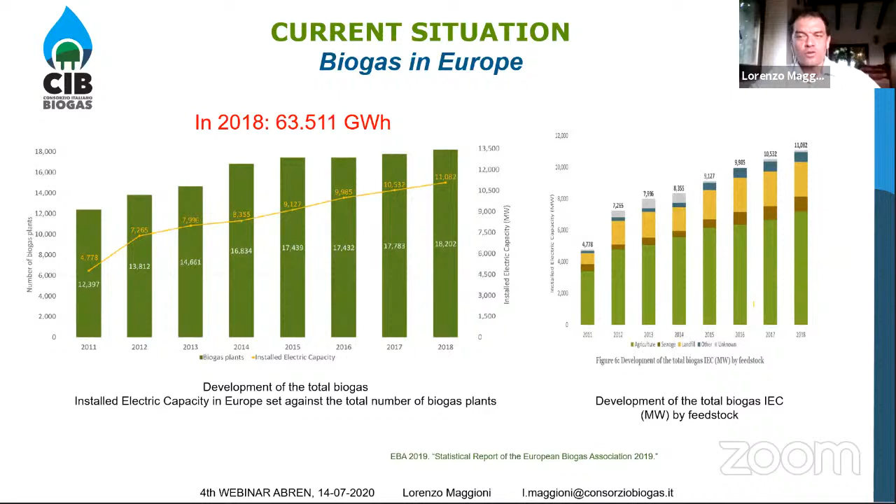For biomethane production, exactly as is happening for electric energy production, we are using mostly agricultural residues. It is forbidden to use energy crops. In order to produce biomethane in Europe, you need to use only agricultural residues and agricultural byproducts. It is also possible to use the organic fraction of municipal solid waste.

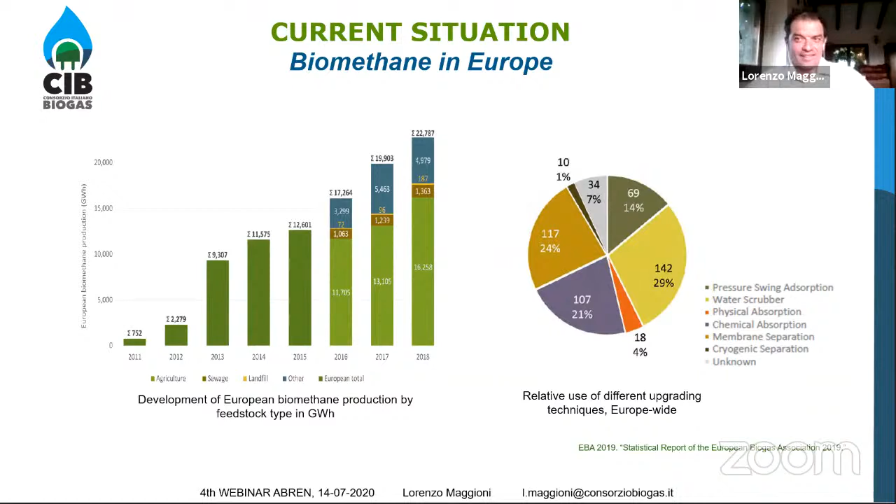Now I want to start to talk about biogas and biomethane in Italy. Italy is the second market after Germany. We invested more than 4 billion euro in the last 6 years. We have more than 1,800 biogas plants with a total installed electric power of more than 1,300 megawatts, equivalent to 3 billion cubic meters of biomethane per year.

Thanks to the biogas sector, it's important to stress that we also created a lot of green jobs. We estimate around 12,000 green jobs.

Talking about biomethane, I want to explain what is happening in our country. For the moment in Italy we have no more subsidies for the production of electricity. In September, only for a few months, we will have the opportunity to submit new projects, around 100 of them. We are waiting for a new decree that will allow us to start again with renewable electricity production thanks to biogas.

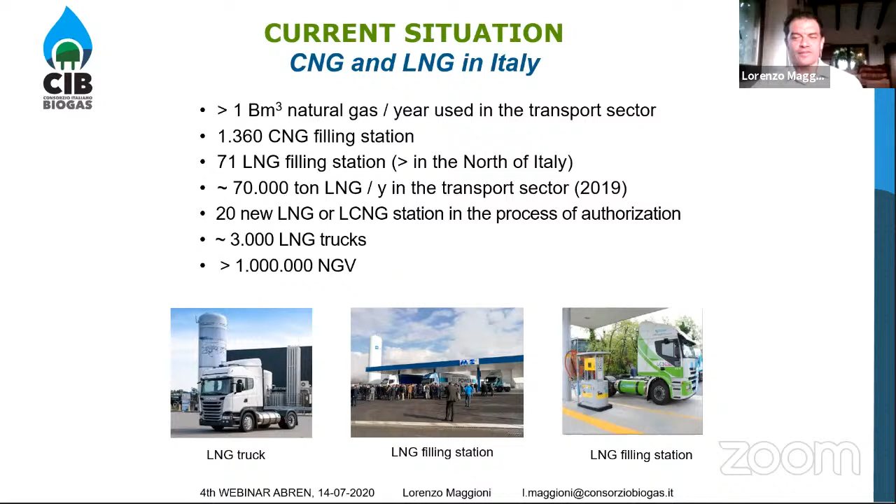So what about biomethane? In March 2018, our Italian government published a really interesting law that introduced subsidies for the production of biomethane. The maximum biomethane production with subsidies will be 1.1 billion cubic meters per year. It's important to stress that to achieve these subsidies, you have to demonstrate that the total amount of biomethane you produce is used in the transport sector.

How is this possible? You can show it by injecting biomethane into the natural gas grid, and then, thanks to a mass balance process, it's possible to transport it virtually all over Italy and sell it in existing CNG filling stations. It's also possible to compress the biomethane and transport it by trucks to sell at filling stations, or to liquefy the biomethane and sell it at LNG filling stations.

The Italian government gives really interesting subsidies if you build a new filling station. You receive 0.6 million euro for each new filling station you build, and 1.2 million euro for each liquefaction unit you build.

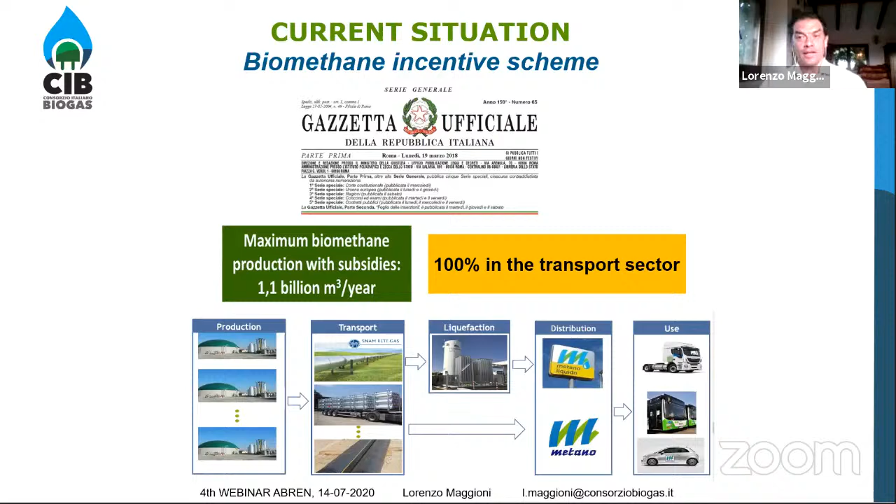It's possible to add these two subsidies together. So if you build a new filling station and a new liquefaction unit, you receive 1.8 million euro, and in addition you will also receive subsidies for the biomethane production.

In this slide you can see which kind of subsidies you receive. I don't want to explain how the system works now—last year when I was in Brasilia I explained it, and now I don't have enough time. Our Italian system is really a little complex. I just want to explain using numbers.

So I want to give you an example: a 1 megawatt equivalent electric biogas plant means 500 cubic meters of raw biogas and more or less 250 to 280 cubic meters per hour of biomethane. Your turnover will be around 1.3 to 1.4 million euros from subsidies alone. In addition to the subsidies, you also receive money from selling your biomethane or liquefied biomethane.

Let me give some examples. If the price of natural gas is 0.18 euro per cubic meter, you receive 400,000 euro per year more. If you sell your biomethane directly to the final customer through a filling station, with an average price of 0.55 euro per cubic meter, you receive 1.2 million euro per year.

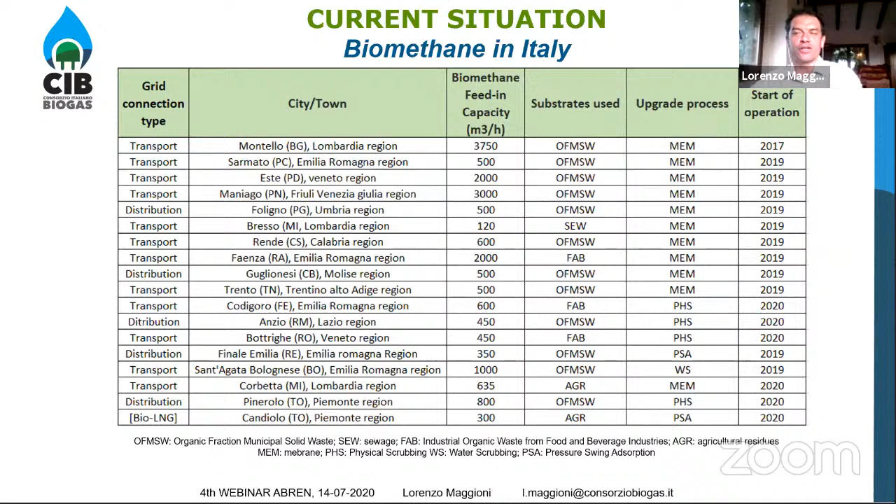It's really important to stress that in some of these plants, they are not only producing biomethane, but also producing carbon dioxide. In the largest plant, in Montello, they are producing a very huge amount of biomethane, but Mr. Moretti will explain better.

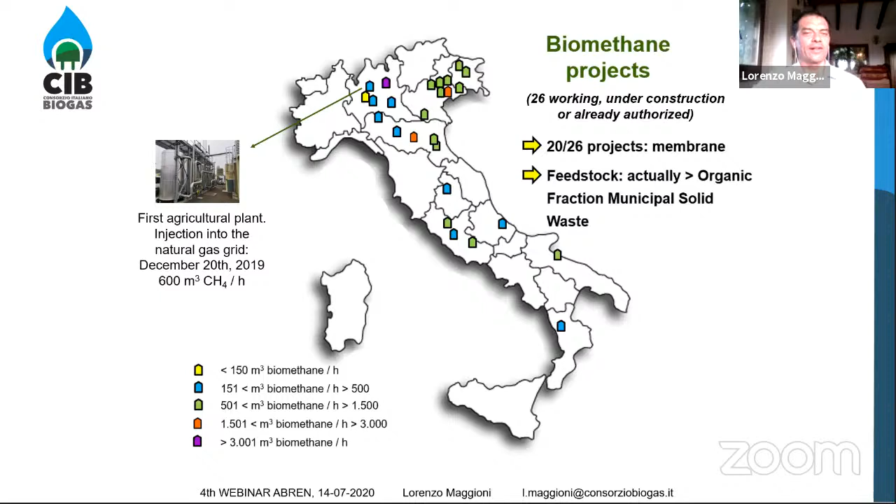Now I have the last 4 or 5 slides, one case study: Cooperativa Speranza, an agricultural cooperative of 5 farmers working together. They own 2 existing biogas plants, each with a size of 1 megawatt electric. They are starting to produce the first Italian kilogram of bio LNG, using 100% agricultural byproducts, and will produce 5.5 tons per day of bio LNG.

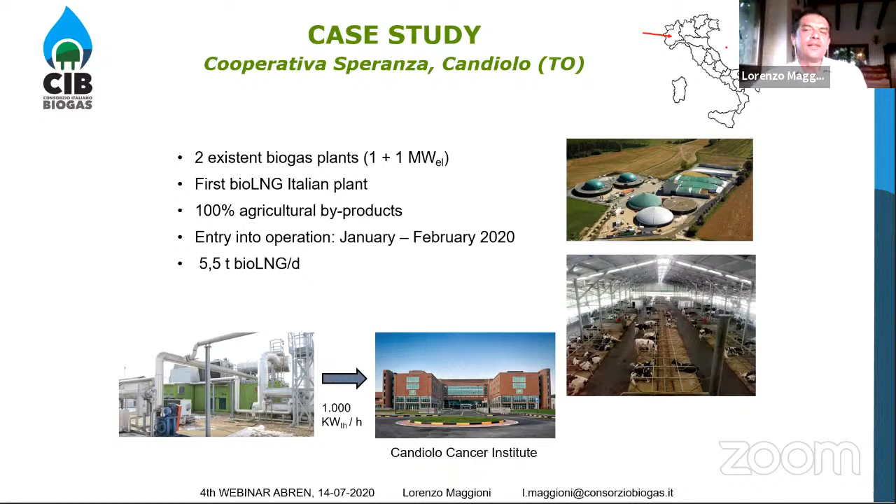It's interesting to show that they are also producing a lot of heat, which they sell to a cancer research institute. By using the heat coming from the biogas plant, the research institute spends less money and creates less air pollution.

How will they use the bioenergy? They signed an agreement with a company called Maganetti, which is the owner of a large fleet of trucks. They have already bought 42 LNG trucks, and Maganetti will start to use 100% bio LNG in their heavy truck fleet.

The Maganetti company owns one LNG filling station, but together with the Cooperativa Speranza, they are building a second one close to Milan, in the south of Milan.

In the next two slides, I will explain why they decided to use LNG and not more diesel.

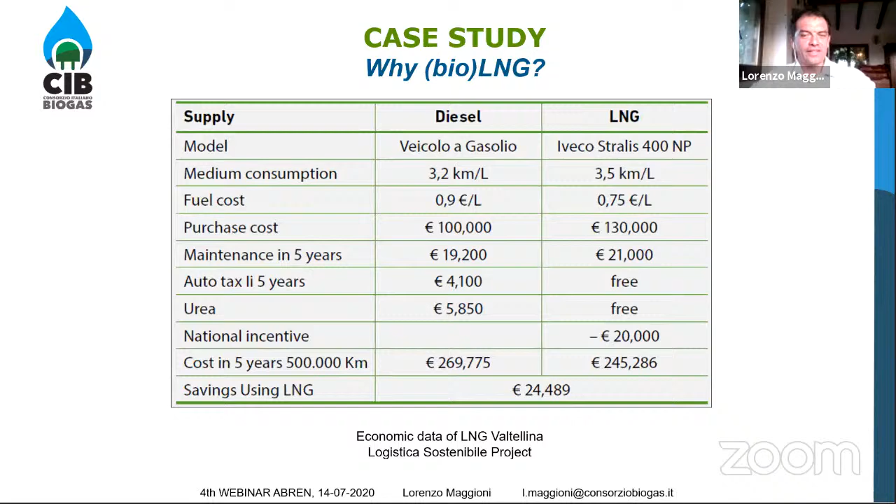Using LNG it's possible to save money, around 5,000 euros per truck every year, and it's possible to decrease pollution. In case you use fossil LNG, you decrease carbon dioxide emissions into the atmosphere by 15%. When they start to use bio-LNG, the percentage will increase a lot, it will be possible to demonstrate a decrease of more than 90%.

Using LNG or bio-LNG it's also possible to decrease a lot the quantity of NOx in the atmosphere, by less than 70%, and particulate matter by less than 99%. Also, the noise of the truck decreases a lot, less 6 decibels for each vehicle.

This is the alarm that is saying that I have to stop my presentation. Sorry, but I have the last slide.

This is the perspective in Italy. We are sure that in the next 2-3 years we will reach the goal of 1.1 billion cubic meters of biomethane, and half of the total amount of biomethane we will produce will be advanced biomethane. Advanced means we will use only agricultural byproducts, only organic fraction of municipal solid waste, and we will not use energy crops to produce this huge amount of biomethane.

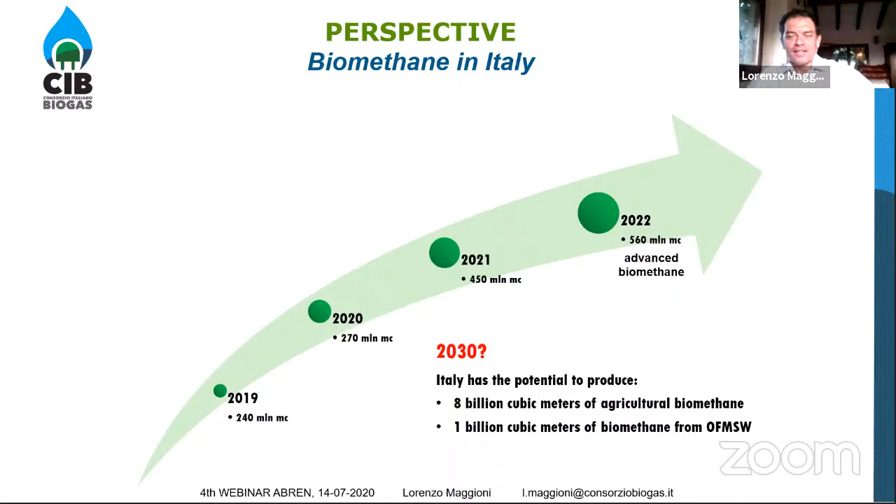So we will be able to produce at least 560 million per year of advanced biomethane and the same quantity of biomethane. So this was my last slide.

Thank you for your attention, and obviously at the end of the presentation I will answer your questions.

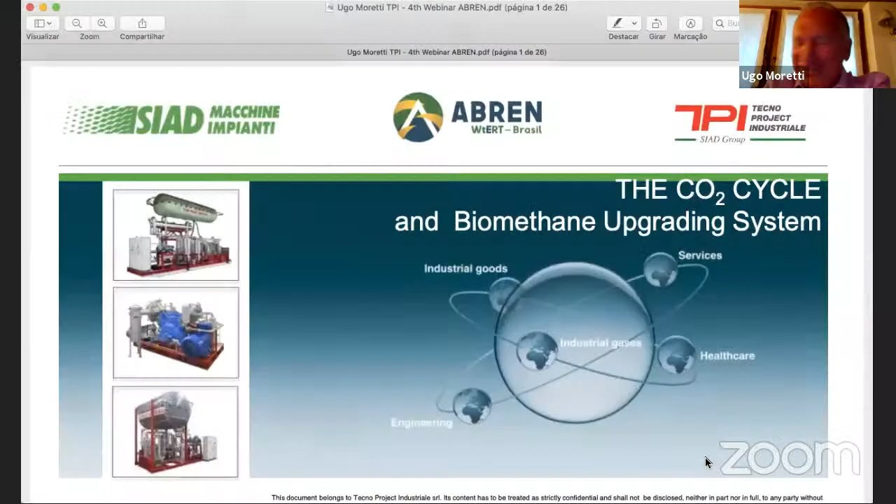Our company is not coming from the biogas field, but is a gas company specialized for 40 years in purification and production of CO2 and the separation of CO2 from any kind of mixture, including, of course, biogas in recent years.

Therefore, we don't start from the technology of biogas like other colleagues, but from technology of gas treatment. We also belong to a company which is a major producer of gas in Italy. Therefore, we profit by using this company for testing our technology on CO2 and application of CO2.

Even though our experience in CO2 extraction is mostly based on traditional solvents such as amine or hot potassium carbonate, we decided to move mainly to membrane technology, and of course still amine, after having selected among all the technologies for gas separation and purification. We know PSA for our hydrogen plant, oxygen plant, nitrogen plant, as well as membrane which we have used since ever for nitrogen production.

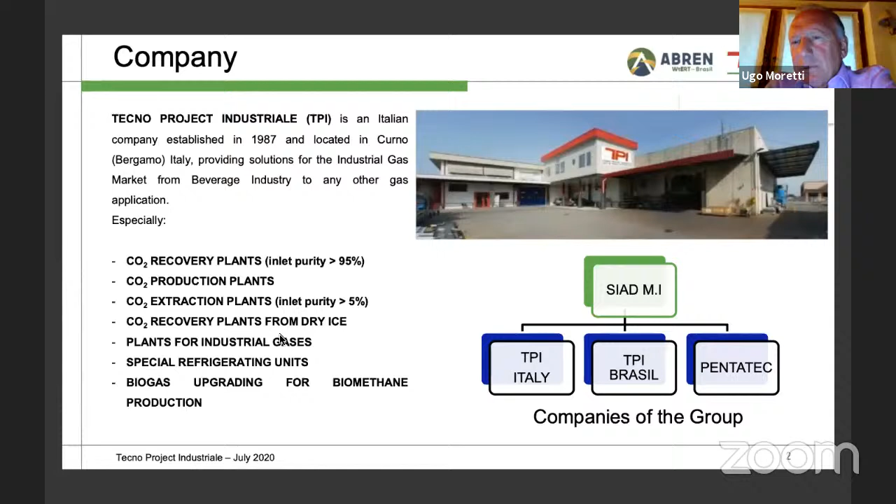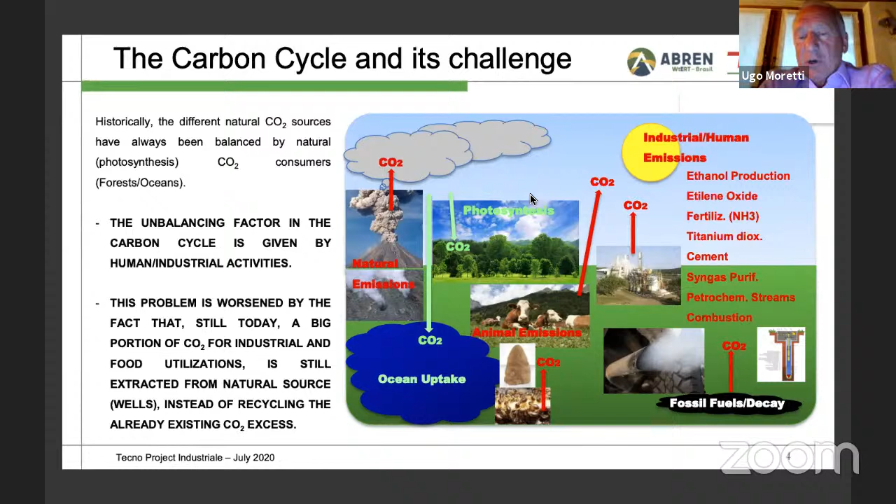Of course we will have an excess of CO2, so we will move away from the lack of CO2 we have now. This is the solution we were talking about before. Now CO2 emissions are still growing and growing. Of course we will not solve the problem of the world, but anyway, by closing the wells, we can imagine something.

Just in Hungary, there is one well extracting 20 tons per hour of CO2 from underground. Only in Hungary, 20 tons per hour. That can be closed easily, leaving it where it is, while carbon capture storage has exactly the opposite purpose of carbon capture.

We are talking mostly about CO2. Now, what do we do with all this CO2? There are so many applications - these are just a few of the several applications.

One is dry ice, well used in the United States for cooling, also for fish cooling. CO2 is freezing and also bacteriostatic, therefore it's best for conservation of food at low temperature. As a liquid, it's cold energy.

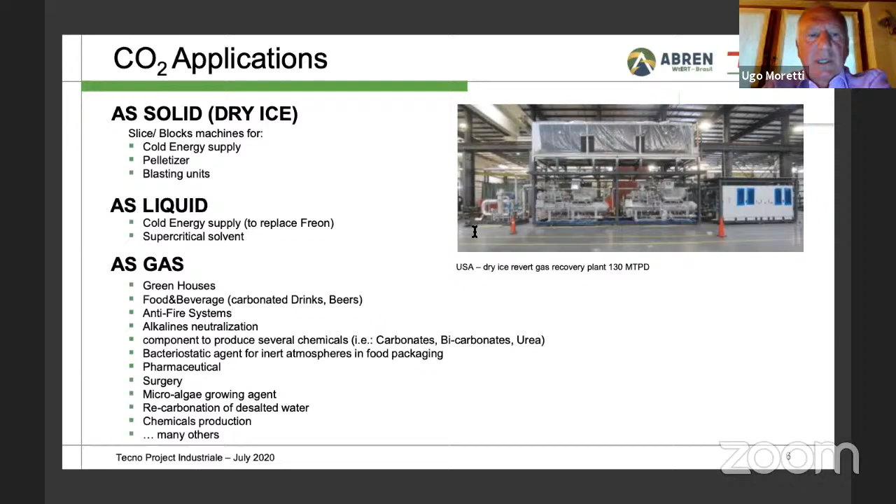Microalgae, and then these are other extraction plants. We have an extraction plant.

CO2 is also used for desalination, for recarbonation of desalted water - one of the applications, for instance, for salted water. This is Saudi Arabia, where there is no source of CO2.

Of course, no breweries, no distillation, no ethanol production there - therefore there is a lack of CO2. So we burn something to produce the CO2 necessary to recarbonate the desalinated water.

For instance, food waste can be a good source of methane. Of course, this country does not need methane, but needs CO2. We just sold Puerto Rico an important plant producing biomethane, but the real necessity, what they really value more, is the CO2 recovery from the biogas. That seems absurd.

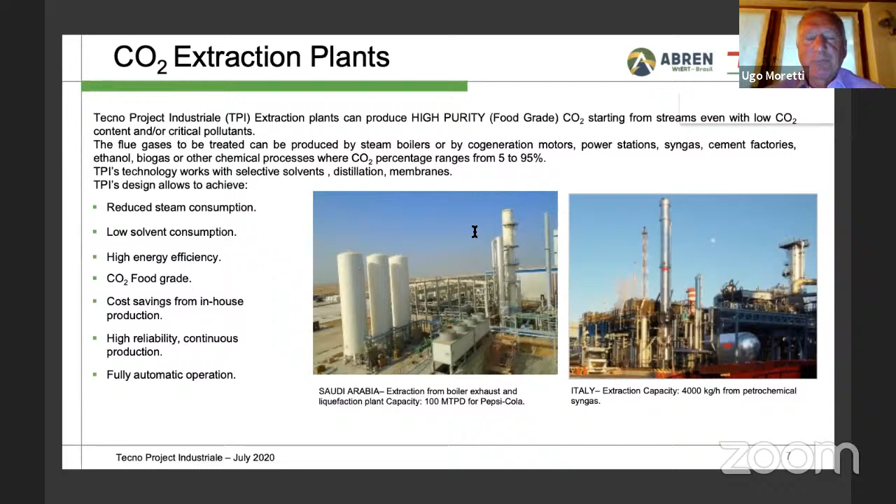The amine system in Italy is not agreed upon, just because it's a chemical, while in petrochemicals it's used to recover or collect CO2 and to sweeten the gas. But in this field, there is difficulty applying amine as a technology, which has the advantage of very good selectivity and can separate CO2 and methane perfectly without any waste or loss. This is a very highly consolidated technology.

Now, the advantage of membrane technology is that it's new - this is why we look for that. The other technology is consolidated, there is nothing more to invent, and optimization is practically impossible. Amine has new solvents, but they're more or less the same as amine. All the other technologies are consolidated, with no improvement.

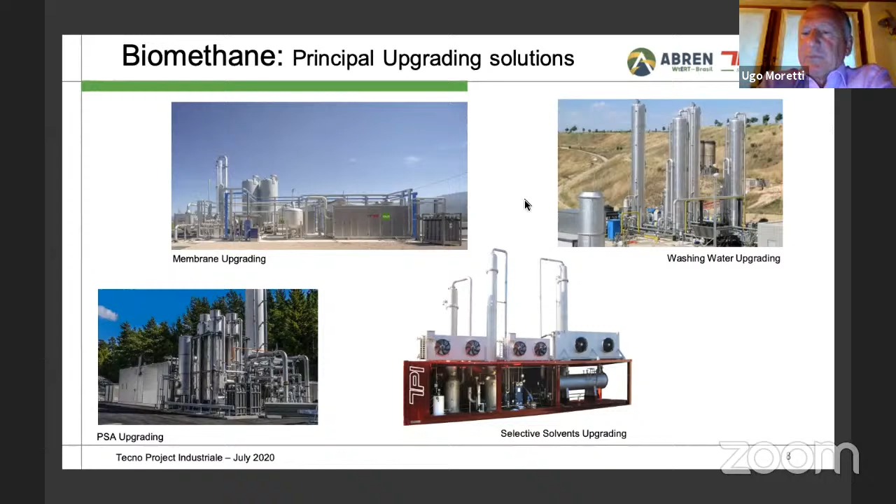This is why it's so successful. In the first plant we installed more than 1,000 membranes; in the Montello extension, less than half with the same capacity and performance. In the next 6 months there will be another generation with even better performance, while other technologies are consolidated, nothing more. We expect the membrane system will decrease in price and increase in performance, so it will be more and more applicable, the most successful technology for biomethane.

This is one of the package membranes, quite large, one of the 6 supplied to SESA. Now, a plant like this that has run for some years has half of the membranes you can see in these pictures.

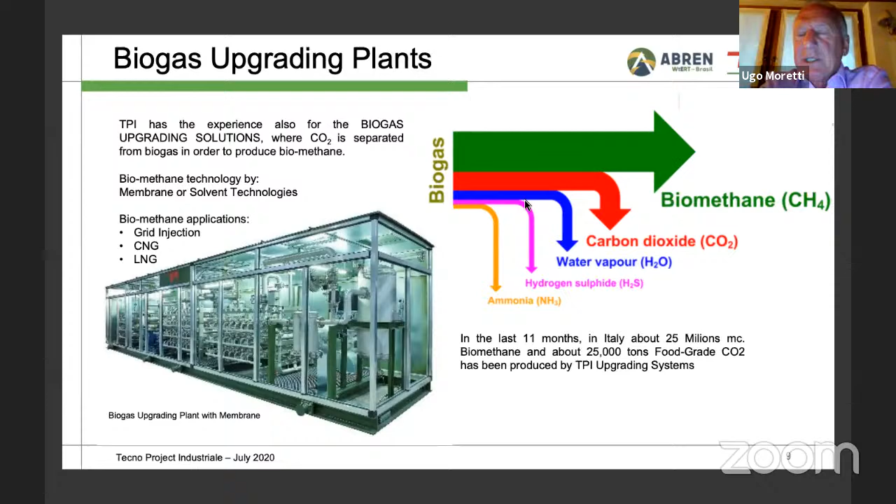This shows how the membrane operates. The system is not a filter - it's like a filter, but it's not a filter, because it's based on a principle totally different from porosity. This assures there's no possibility of virus or bacteria passing through the membrane into the CO2. This has been demonstrated because the membrane is a dense membrane, not a porous membrane.

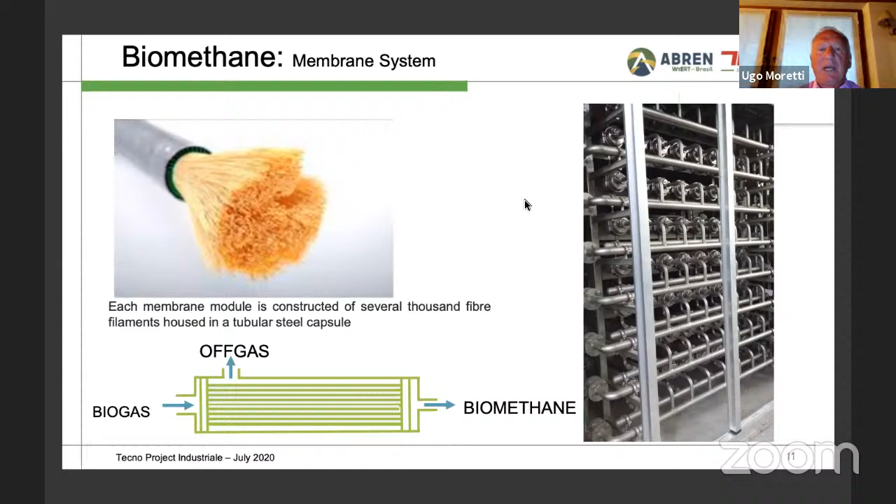This is what each membrane looks like. Manufacturing the membrane is really quite difficult, a really high technology. It doesn't look like high technology, but the fabrication really is. In fact, there are very few producers.

In the case of biogas, it's more or less the same components, except in FORSU, but the type of components and impurities are always the same. The difference is the quantity of impurities present in each biomass. The worst is FORSU, organic waste with a lot of VOC, volatile organic compounds, which damage the membranes, but also damage other technologies besides water. Our experience starting from the worst source, unfortunately, allows us to set up the technology exactly right.

H2S is present everywhere. VOCs are mostly present in organic waste. Siloxanes are mostly present in landfill biogas.

This means TPI has the possibility to treat the biogas and make the complete chain, including liquefaction. We have upgrading with separation of biomethane and CO2, making the CO2 food grade, and the possibility to produce LNG, with purification over 99% methane and removal of the last CO2.

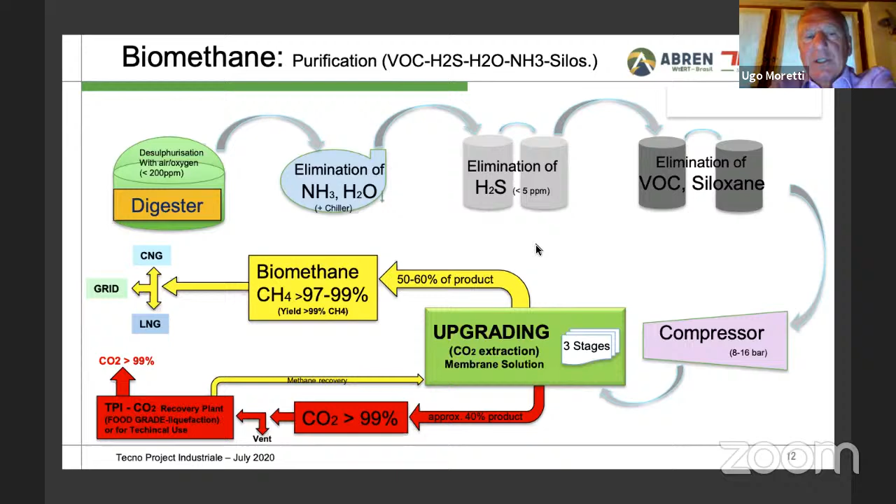This is the simplified diagram, a typical one. The difference from organic waste is it's richer in methane, while from agriculture it's more or less 50-50. This is the upgrading diagram from energy crops.

This is a small schema of the 3 stages we use: 3 stages plus CO2 recovery, which is a typical CO2 recovery plant - same technology we use in breweries, ethanol systems, or other recovery plants. Very simple and very consolidated system.

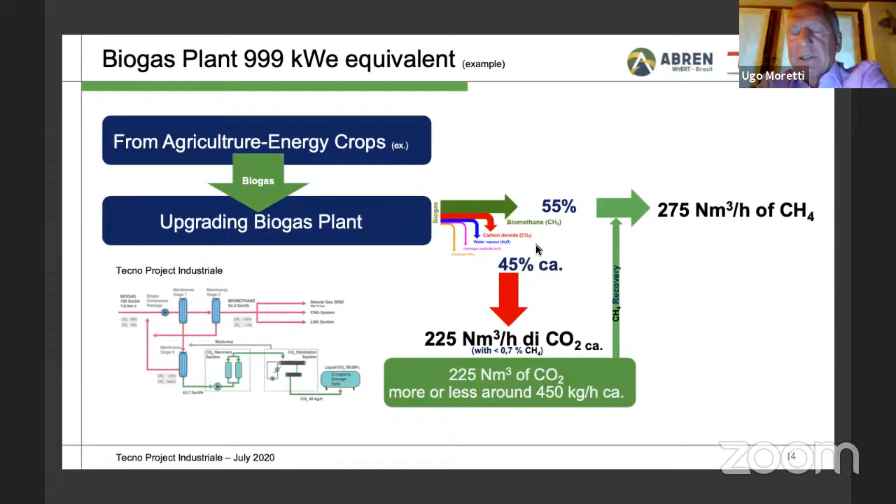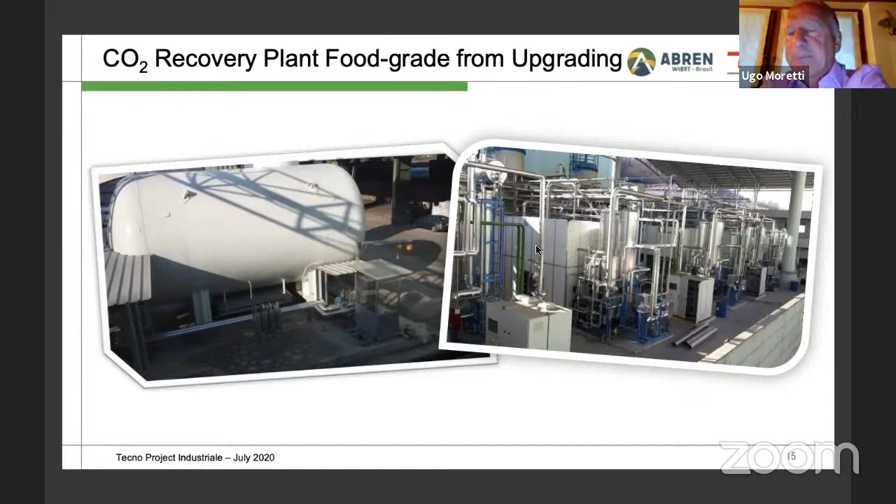This is a picture of the Montello plant, which is very impressive now - one of the 350-ton liquid CO2 storage tanks and one of the first lines. You can see only 3 lines here; the first plant had 3 lines, and now there are 3 more, each treating 2,500 cubic meters per hour of biogas. In total, 15,000 cubic meters, which we believe makes this the largest biogas plant based on membrane in the world for Evonik.

This is again the typical membrane system. Let me say the membrane system is relatively simple because it's composed of pre-purification, which is very important, and just a 3-stage membrane system that is really simple. After 4 years of experience in operation, we found they're not as delicate as they seem. We were concerned in the beginning about the problem of membranes being delicate against oils - that is true, but in the end, apart from the pilot that we destroyed a couple of times, we have not had issues.

But now with good pre-treatment, we have not had any problem after practically 3 years of operation, 8,500 hours per year. In the Montello plant, we have not had any damage from impurities.

We installed a lot of this. This is the system, very simplified: the biogas compressor sends gas to the first stage membrane. From the first stage membrane, the permeate, which is CO2, goes to the third stage. This means the CO2 passes through membranes two times, so it's impossible for bacteria to pass into the CO2.

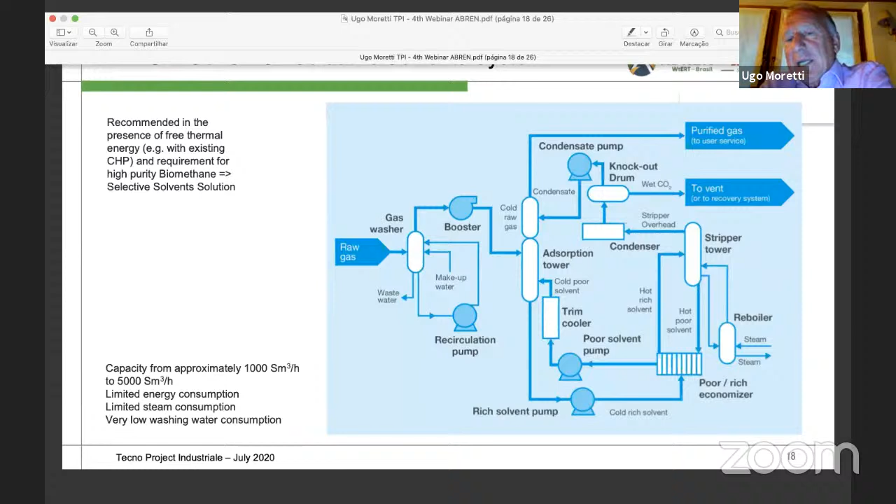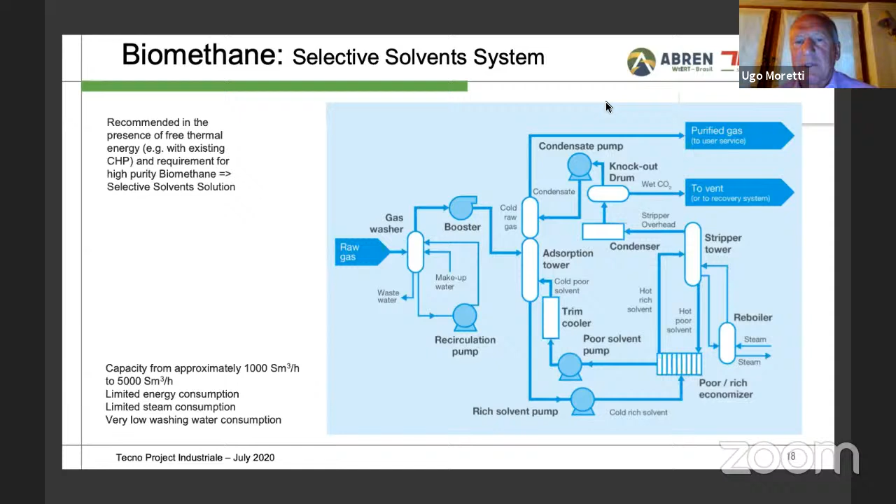Something that is chemical is a washer with amine, but we absolutely have the technology. From the point of view of consumption, there is thermal consumption, while in the membrane there is electric power consumption. You have to evaluate what is more available.

SESA Group alone is producing 9,000 cubic meters per hour of biomethane, and there's also one more. Montello, next week on the 27th, will by end of month produce again, in total with the old and new plants, 9,000 cubic meters per hour of biomethane, and they will produce practically 220 tons per day of CO2, which will cover more or less 15% of Italian CO2 consumption.

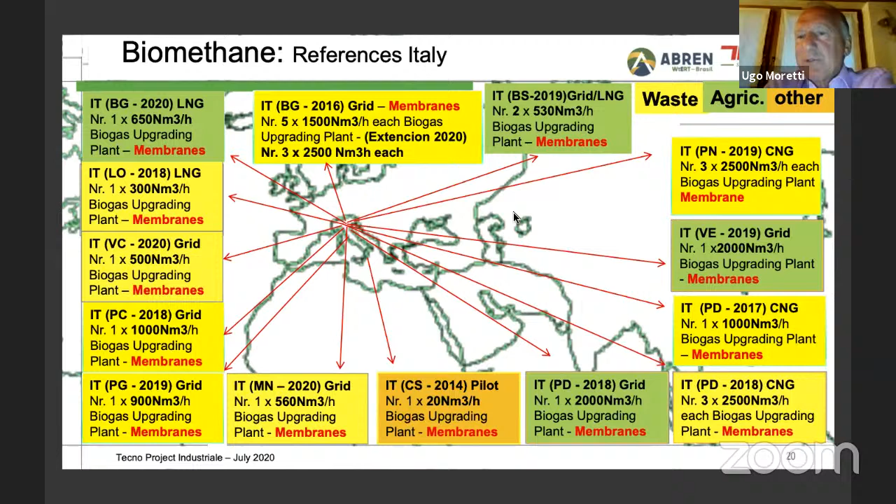That's changed the market for gas too. Now, because the market in Italy is booming, but it will finish eventually, we're moving into other countries as well.

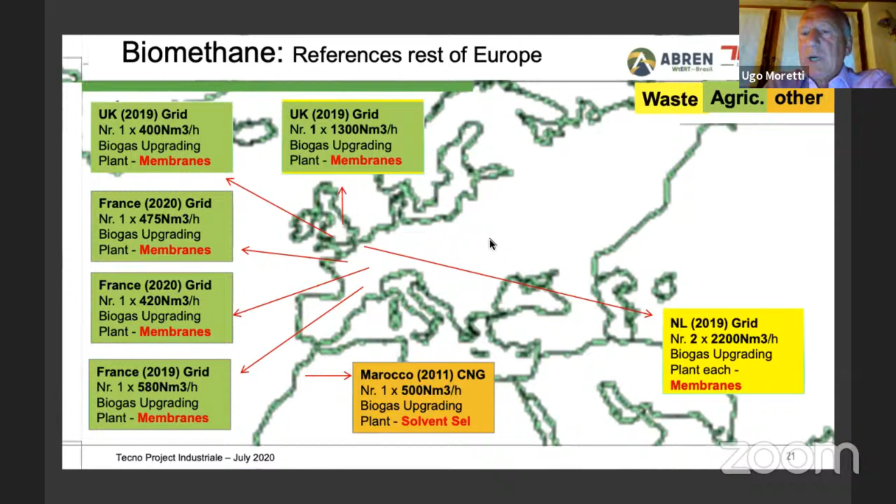In England we already installed some plants. In France we are starting - one is already installed, two under delivery. In Morocco there is one, but it's an old one, from 2011. Now there's also a quite large plant in the Netherlands - two plants, 2,200 cubic meters per hour each.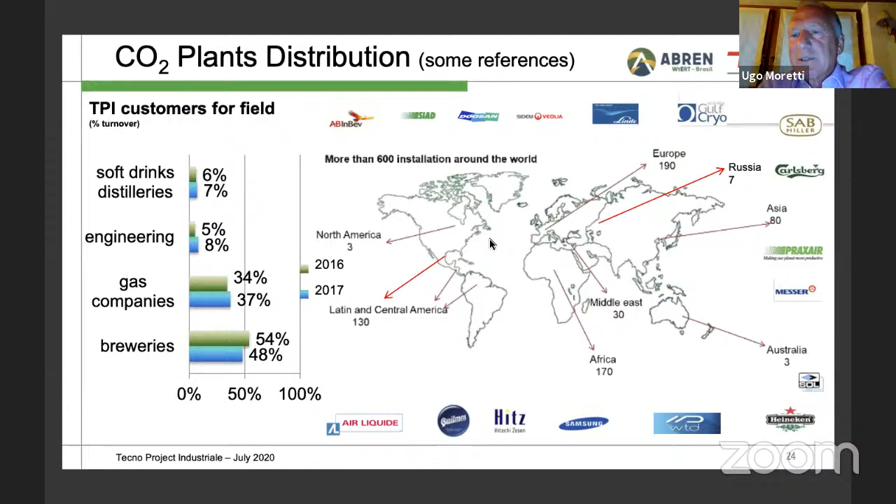I bought and founded this company in '97, and now we are the main producer of CO2 in Brazil. We think we are the number one in Brazil for CO2.

Thank you, thank you very much, Ugo, for this presentation. It was excellent to learn about your technology, membrane technology, the biggest membrane plant in the world, and it's a huge company with great knowledge that can share this information in Brazil, which has a huge market to improve.

And next, we'll talk about the conversion of diesel or gasoline engines into dual fuel CNG and LNG.

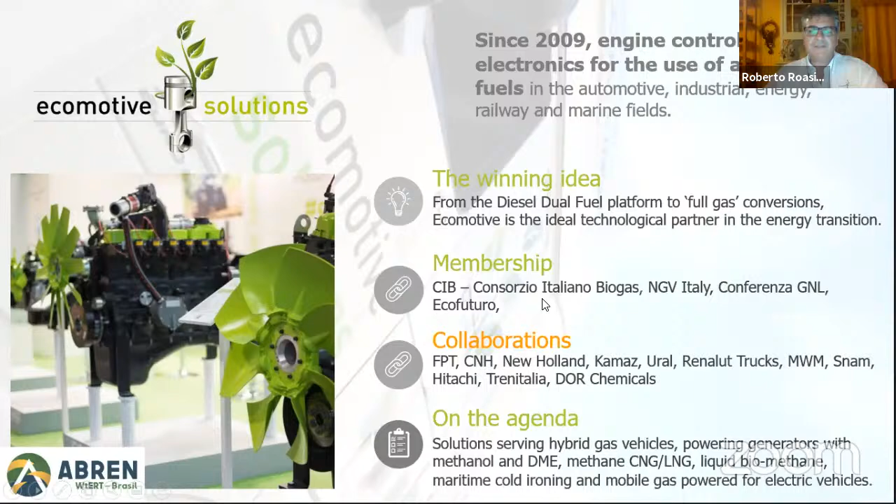Ecomotive Solutions has been working for 12 years with the most updated technologies to manage engines, both diesel and gasoline. We work with big names already in the field of automotive and industrial equipment. At the moment we have open projects with FPT, CNH, New Holland, Kamaz, and Hitachi. Our role is always to design solutions related to engines — engine work is definitely our core business.

Now I wish to introduce you to one of the foundations of our technologies, established already 12 years ago, when there were not so many companies speaking about the final use of natural gas in diesel engines. In a diesel engine you usually can't burn natural gas because it has a very high ignition temperature requirement. That means in a diesel engine, where you don't have a spark to ignite combustion, you can't reach the temperature for self-ignition of the air and natural gas mixture.

Because of that, instead of using a diesel engine, many companies work with Otto cycle, spark-ignited engines — this has been popular for a long time. The first applications were in cogeneration systems using big engines with spark ignition, essentially large gasoline engines converted to natural gas. But our idea was to convert the existing large fleets of diesel engines on the market into something able to use natural gas as a fuel.

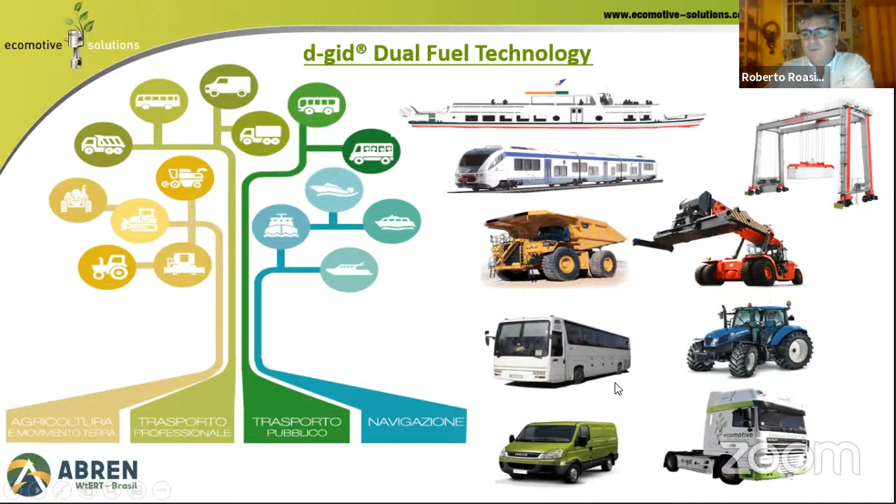The field of application of dual fuel technology is really huge. Any of the pictures you can see here are fields in which we already work with our technologies. And the advantage of having a diesel that also uses natural gas is very nice, because with diesel dual fuel, you can work both with this mixture of diesel and gas, or you can use diesel as the original vehicle fuel.

So in any market where the infrastructure for refueling natural gas is not well developed or is ongoing, the use of dual fuel is really a very nice way to start up the market of natural gas in transportation, because you can start with your tank full of natural gas, and when you finish the gas, far from any service station, you can simply switch back to 100% diesel, without any problem of power or different style of driving. And you can finish your daily work without any trouble.

So the main advantage of this technology is that it is not a mechanical technology. We don't touch the engine mechanically. We are only adding an injection system for natural gas, and a new ECU that works together with the original ECU in order to manage the energy inside the engine and decide how much gas to put in and how much diesel to reduce.

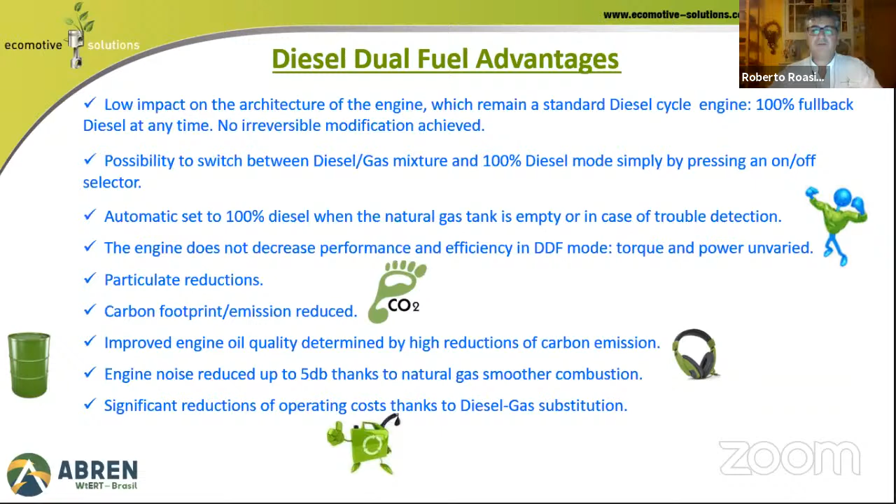So we are ready, since the beginning, to use any kind of natural gas. We can use compressed natural gas or liquid natural gas, cryogenic fuel, in the same way, because the system is able to manage both without problems.

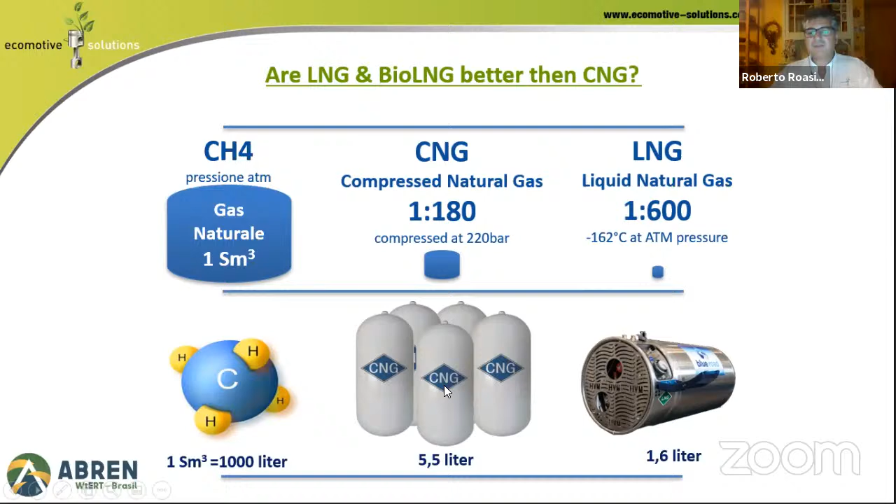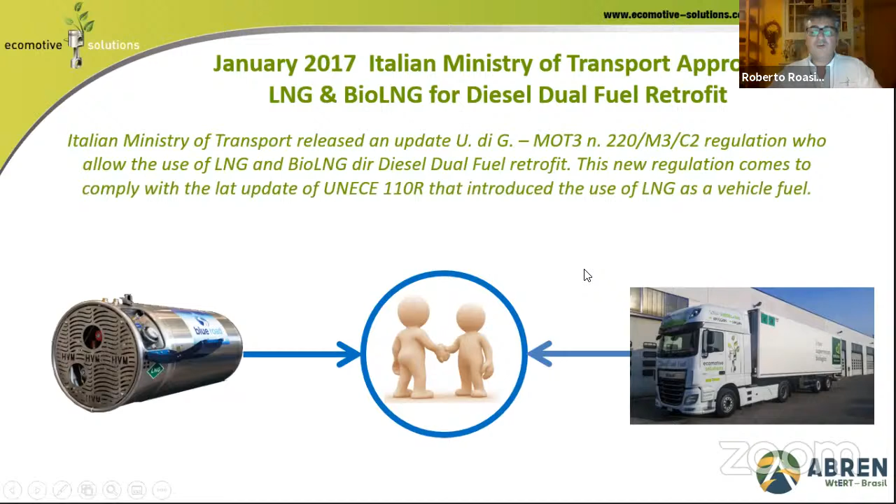Then we have to speak about our project together with the CIB consortium of Italian biogas producers about the use of biomethane as a fuel.

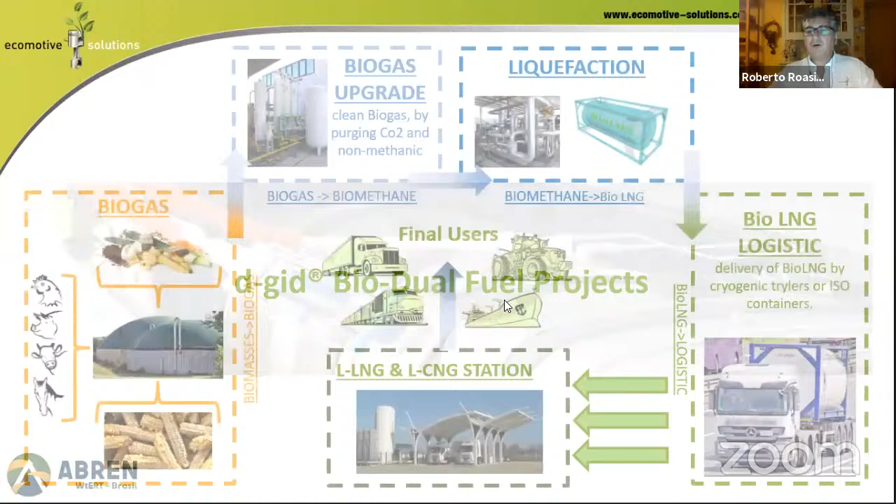The process of producing biomethane is now well known to you. Starting from feedstock or any organic waste, you can create a biogas, and then the biogas could be purified with an upgrading system. Our philosophy is to not stop with the gaseous product, but convert it into a liquid product, because the liquid product means having the capability for logistics.

So I can transport the liquid natural gas and bring it to a station everywhere, even if the station is not connected to the grid. This reduces the dependence of natural gas on the pipeline, and this is really great. It's good for the environment, but also for the money, because this multiplies the possibilities.

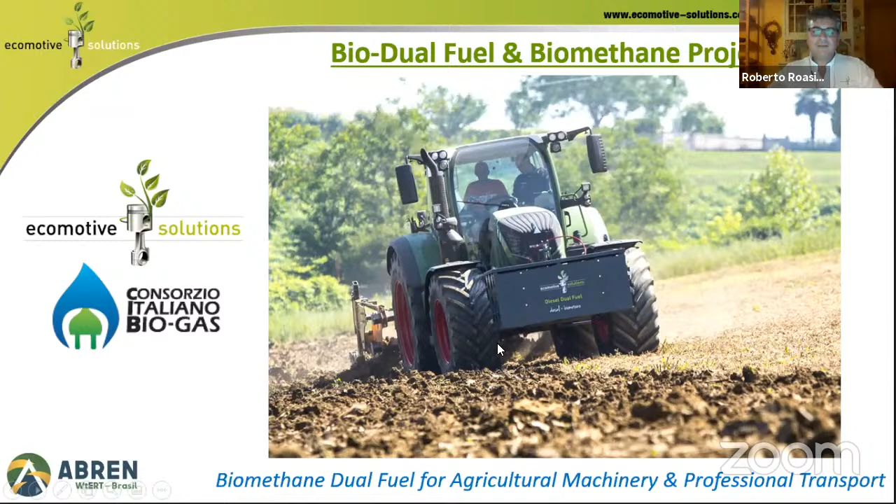We also started considering agriculture as a big potential for the conversion from diesel to dual fuel. You can see that we invented some solutions to store CNG on the vehicle, and this is some of our experiments.

This is an official project with CNH, New Holland, to store more fuel on board. This is a truck we presented in Russia, because it will be produced by CNH in Russia. We presented this last year at the St. Petersburg Gas Forum, and this will really be a popular solution in the near future.

We are also converting a vehicle to full gas. This is a system that produces food for animals. In the beginning it was diesel, but now we converted this diesel to full gas.

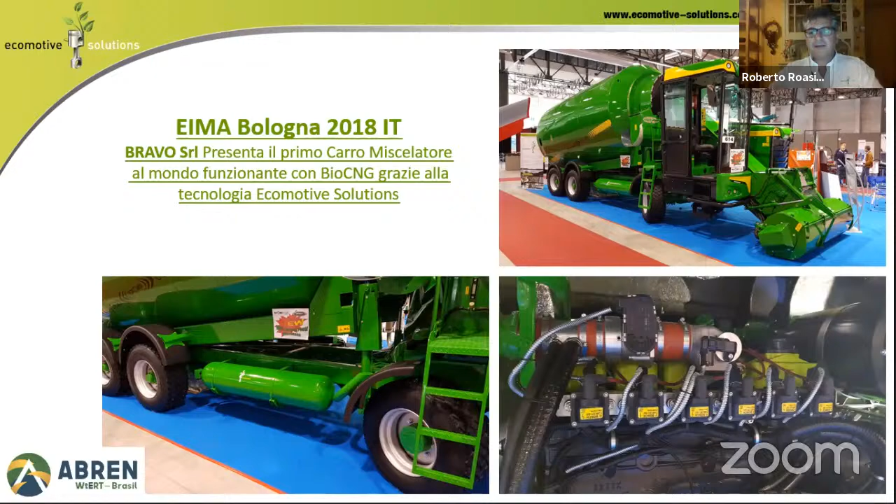This is an Otto cycle engine, but we converted it to let the vehicle use biomethane that is produced there on the farm. This is one of the first producers of biomethane and liquid biomethane in Italy, and now this vehicle can run in the stable without making pollution, because it's running on bio-natural gas.

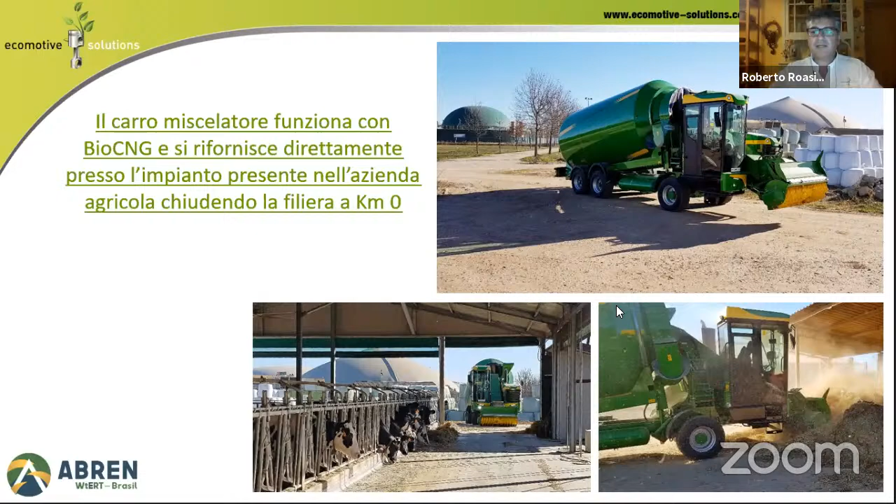This is another option, a telescopic system that can run only on compressed bio-natural gas, in a farm that is already using this product as a fuel.

And then already at Expo 2015, we also tried to use LNG, liquid natural gas from a biologic source, on a tractor. Let me say, this is the future that we are looking for.

We love the use of LNG so much that we started producing LNG with our own company, named 2LNG. This company produces a small liquefaction system that can start from 2 tons up to 50 tons per day.

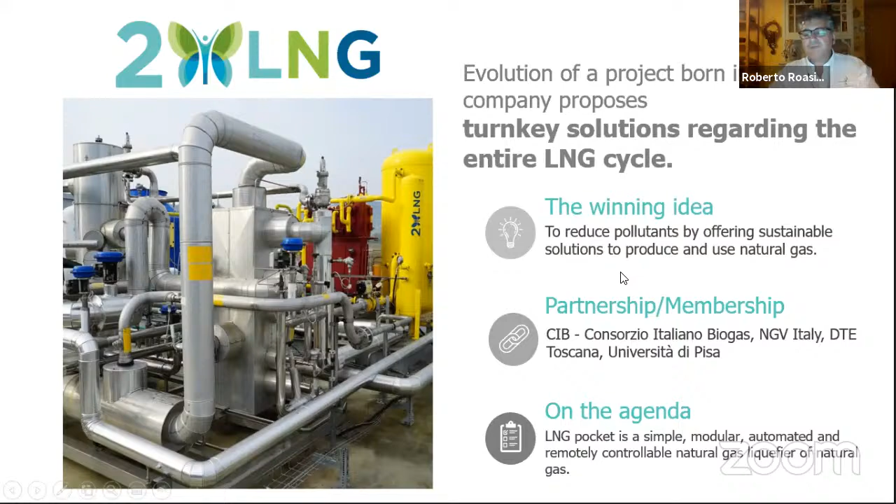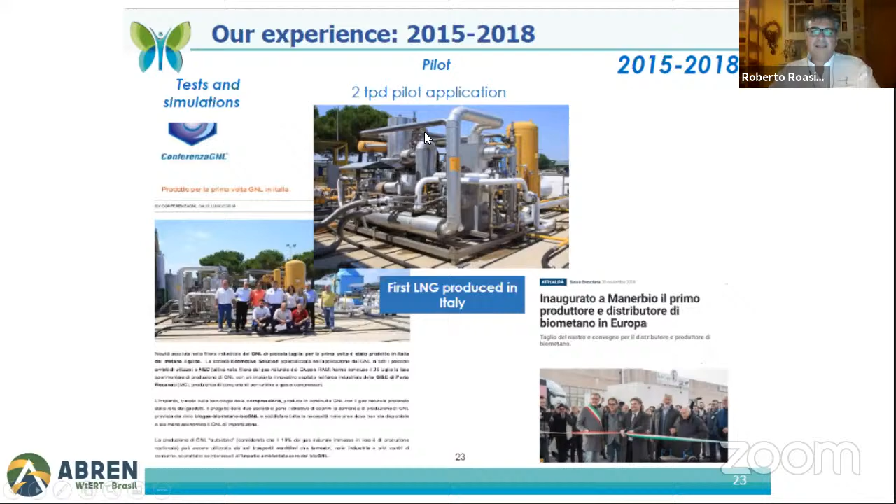This is also one of the first companies in Italy to produce liters of LNG, and the project started in 2015. Now we have a product ready for the market, which, thanks to many cooperations, will be a referral point for the liquefaction of biomethane.

Some other projects we are following: for example, in Switzerland, we are converting a small ferry. This is the engine of this small ferry, and we are converting it to dual fuel to work with less pollution on the lake.

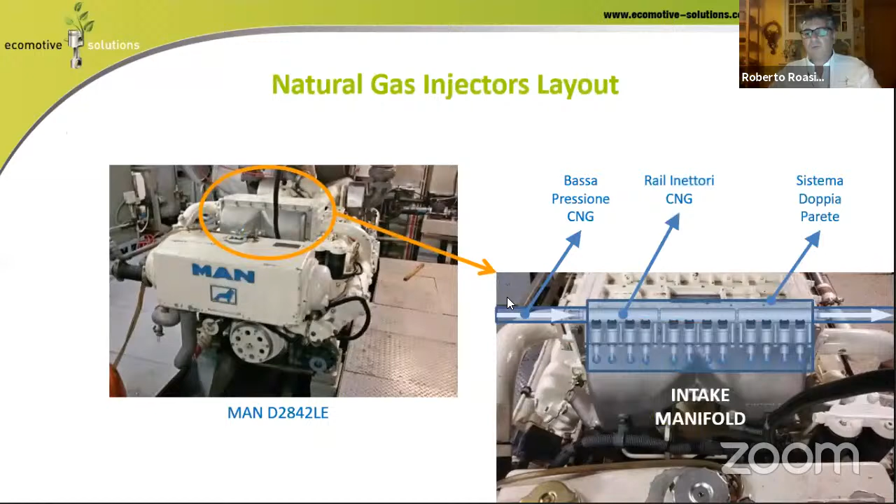Then we are working in the Lagoon of Venice. This is a project for DHL, and we converted this engine to work with natural gas, so with less pollution in the Lagoon of Venice, which is really sensitive to emissions.

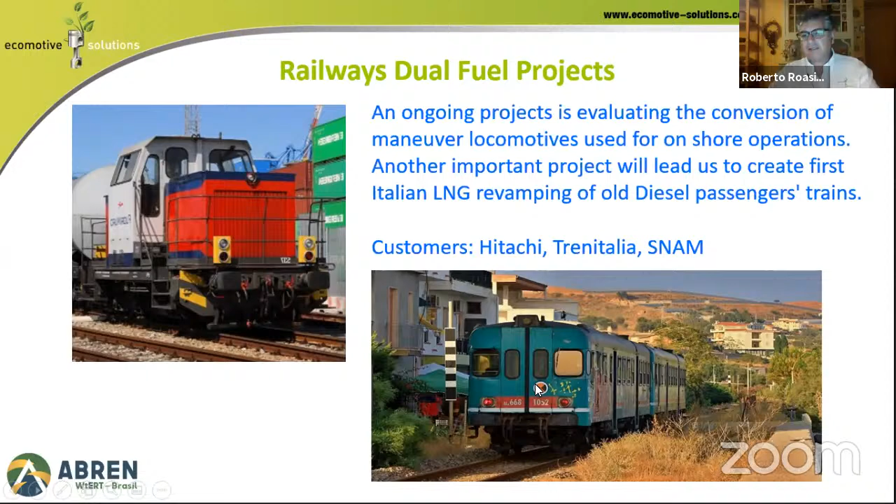This is a project we are leading together with Hitachi and Trenitalia, the owner of the railway in Italy. We still have many old trains working with diesel, so now we are converting the first one to be an LNG gas train that works only with LNG instead of diesel. We are converting all the diesel engines to 100% natural gas, and this will be the first try in Italy, to then convert all of Trenitalia's fleet.

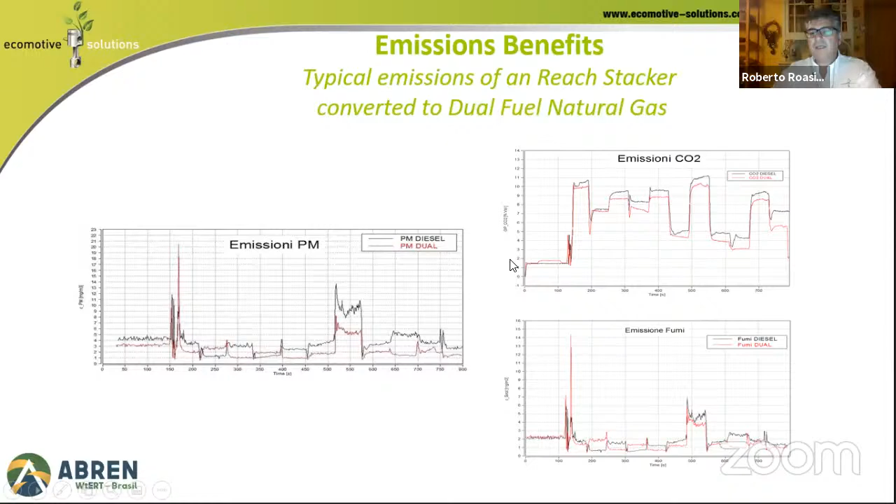We analyzed some results. You can see here that in black you have the diesel pollution, and in red the dual fuel pollution. You can see there is always a benefit to using this mixture instead of just diesel.

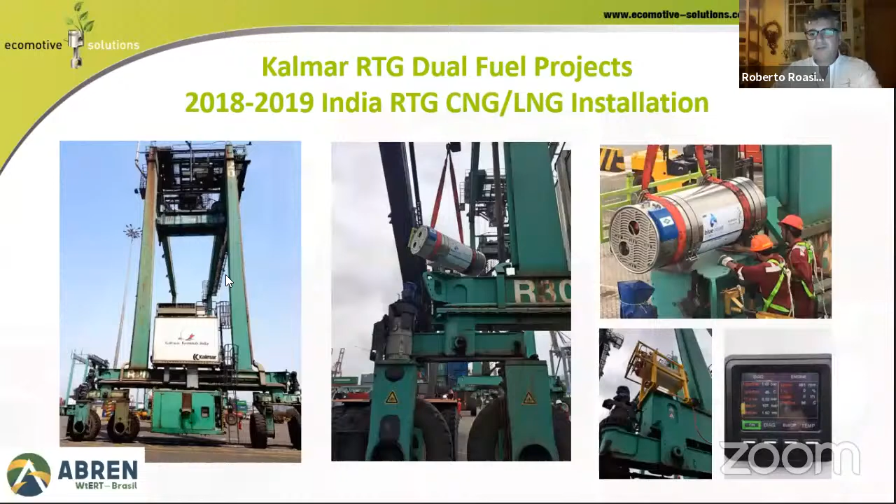Then we extended this technology also to the cranes. So this is another project. You can see the installation of LNG fuel tanks on the cranes. The first one in Italy, this one in India. And we are really happy because this application is growing.

Now in South Africa, we are also converting big dumpers to dual fuel. And in the near future, there will be a big fleet of dumpers also in India, which is growing. This is another project that will bring natural gas, and hopefully bio-natural gas, for special transportation.

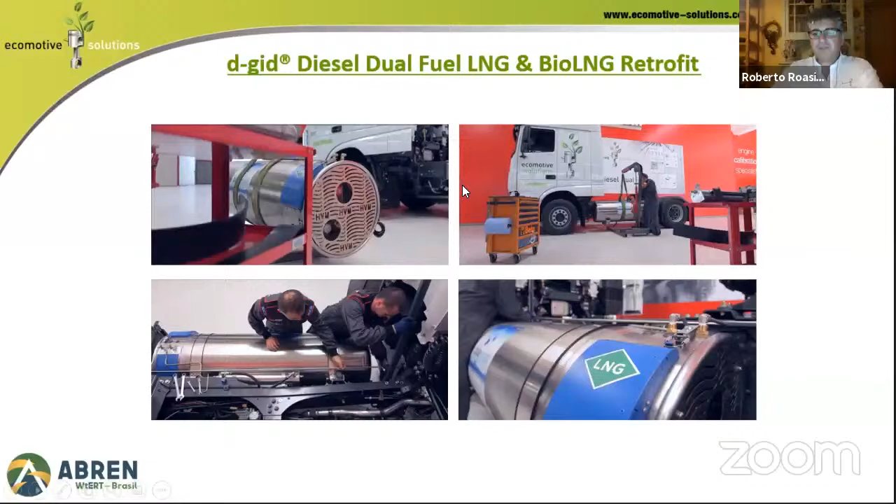So all these are examples of systems that we already converted. You can see here that there are many operations that we can achieve together with our solutions.

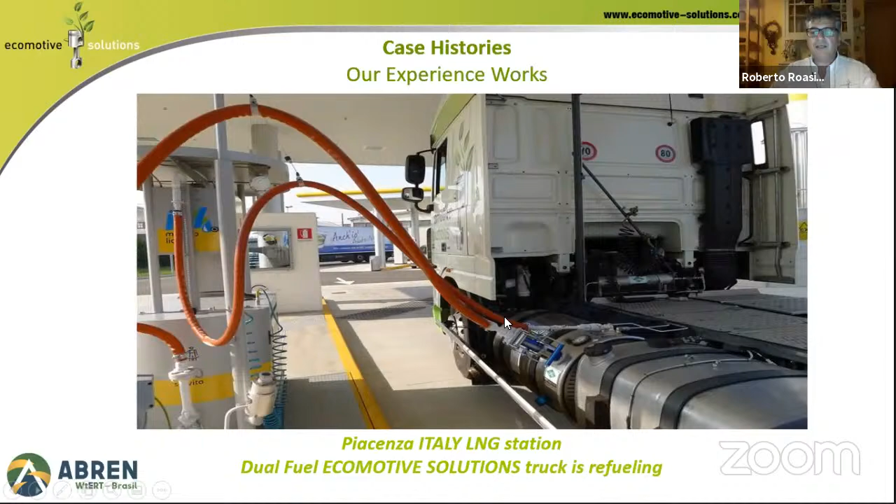We can, for example, work on existing fleets of trucks to convert them to dual fuel. We already worked, for example, in Santo Domingo for the Coca-Cola fleet, with CNG. We are tier 1 with KAMAZ, with more than 2,000 converted trucks in Russia. Also for Iveco, we are working in Russia. Then we are working in Mexico on fleets of onboard units.

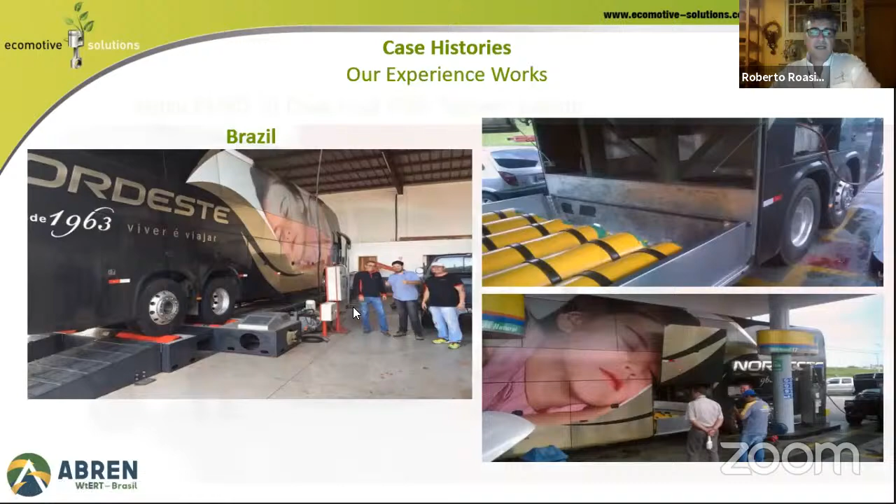Then we are working in Slovenia for a big fleet of Mercedes LNG trucks. In Brazil, we already did some experiments with CNG. Buses in South Africa, buses also in Mexico. Now we have buses in Brazil, long-haul, converted to natural gas. Then we are working for a municipality that needs small vehicles for rubbish collection, and also sweepers and so on. All these vehicles I'm showing you are converted to dual fuel with the use of natural gas.

Of course, the same engine can work easily with bio-natural gas, because natural gas and bio-natural gas are exactly the same product for us in terms of quality.

We also had a challenge in 2018. We converted a pickup truck and drove it 40,000 kilometers in 4 months. We crossed from Italy to China and came back, all in dual fuel, and we were always able to refuel natural gas in the fuel tank. This was a really fine challenge.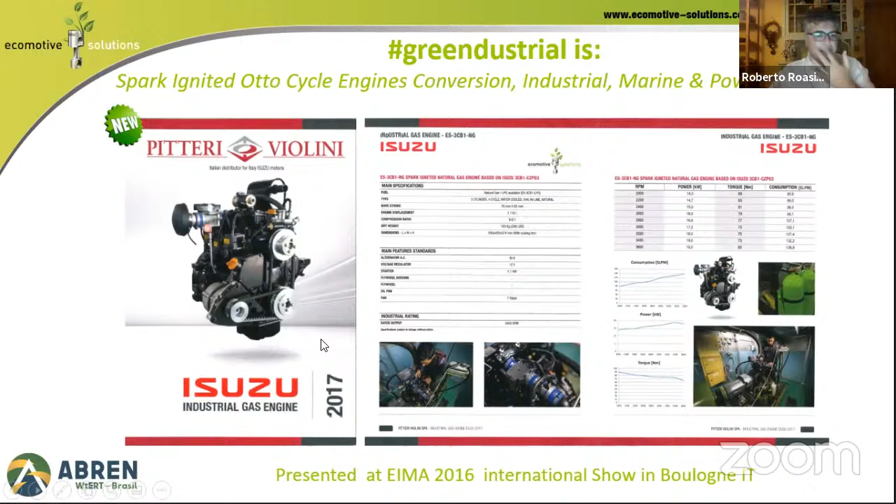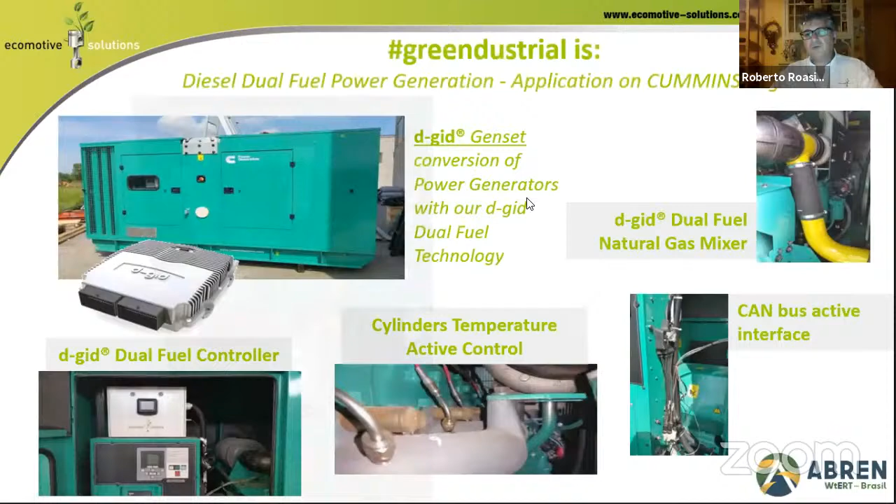And then, as I told you, we also produce engines, full gas engines, starting from a diesel-based block. For example, we are the official producer of Isuzu engines, small engines used for refrigeration systems. We are also working with big engines for cogeneration systems, all in dual fuel or dedicated to natural gas. So natural gas is a flexible solution.

It is very good when we use bio-natural gas instead, because of the reduced pollution and better results for environmental protection. So I hope that this technology, which we designed and developed many years ago, is still interesting, especially in markets where the bio-natural gas business is starting right now. And so we hope to come back soon to Brazil for a new adventure.

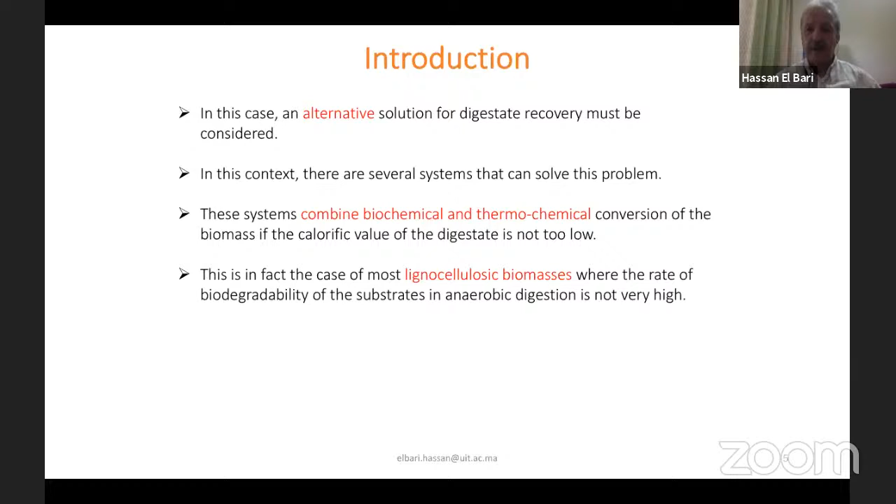Some examples of bioenergy technologies can be used in combined form to close the loop and achieve the circular economy objective. We can see gasification and pyrolysis combined with anaerobic digestion to produce heat, electricity, and fuel.

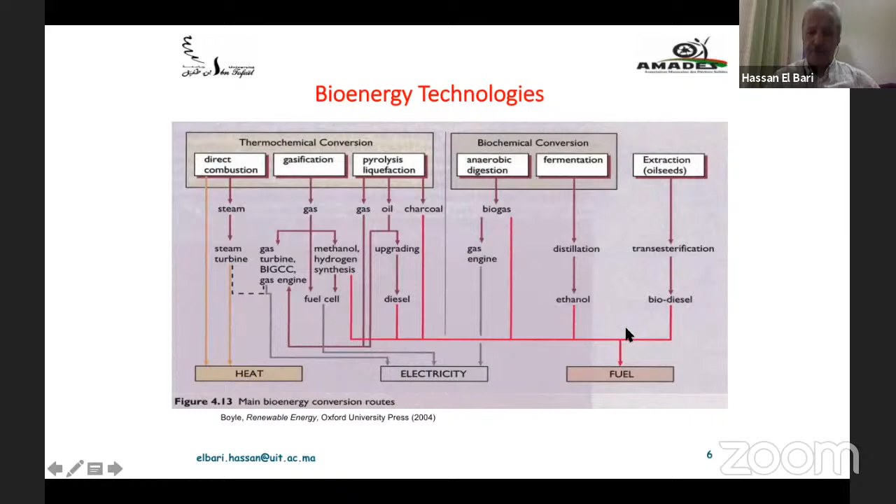An example of coupling and combining thermochemical and biochemical biomass conversion: you can see here when we produce biogas, after cleaning up to remove CO2 and obtain methane, we can separate the digestate into liquid and solid fractions.

The liquid fraction could be used with algae products for water treatment, and for the solid fraction, we can combine pyrolysis or gasification to produce syngas. This is a way to close the loop in order to achieve the circular economy objective.

This is an example of our pilot plant in our laboratory at Ibn Tofail University. It's a UASB digester with a biogas flow meter, used for biogas production from recycled paper wastewater influent, coupled with solar energy.

We try to heat the digester with solar energy, and we have integrated a micro-cogeneration system to use the purified biogas.

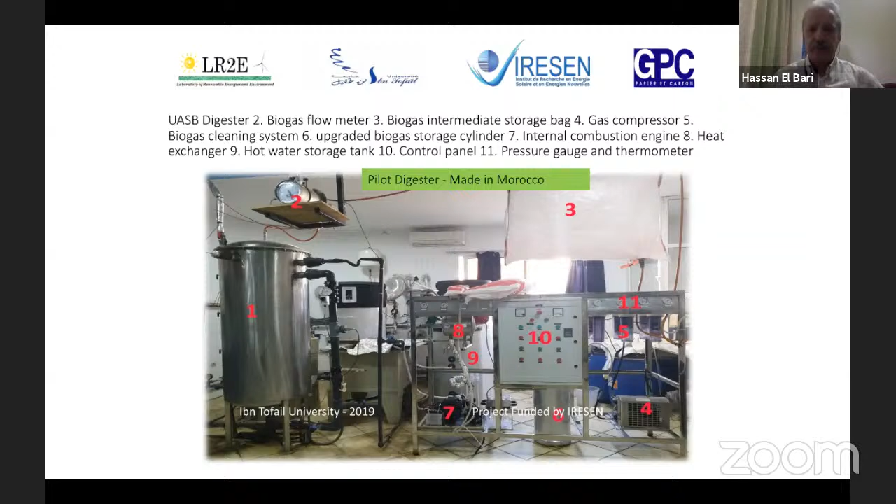Let us look at the role of anaerobic digestion and biogas in the circular economy. In the future, bioeconomy waste will be transformed into high-value products and chemical building blocks, fuel, power, and heating. Biogas facilities will play a vital role in this development and in the implementation of novel production paths that arise in the transition to the bioeconomy.

The flexibility of the anaerobic digestion system and its ability to digest a multitude of organic feedstocks, while producing a significant range of products, ensures the role of AD and biogas in the circular economy.

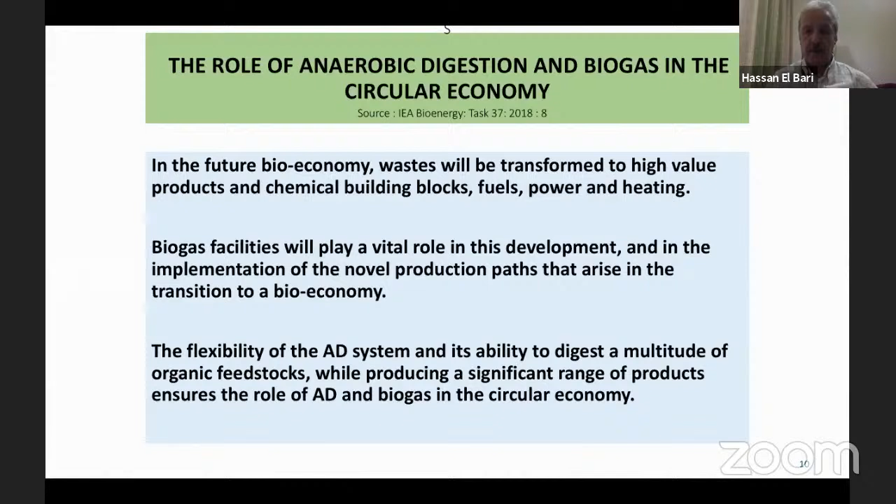There are three circular economy areas which are linked: waste management, consumer demand behavior, and supply from economic stakeholders. The current concern of scientists is the basis of the circular economy and the optimization of the value of material flows.

Circular economy can only be achieved if all material flows in the whole value chain are considered. The material circularity indicator is used to estimate the degree of material flow restoration of a product, and as a decision support tool for designers. There are three circular business model categories at different value chain steps: design and manufacturing phase, use phase, and value recovery phase.

It's crucial to integrate all suitable energy-to-waste technologies in the waste management system to achieve circular economy objectives. Policymakers and the public can be made more aware of the importance of circular economy through different life cycle approaches, such as LCA and others. The achievement of circular economy objectives through sustainable biogas recovery will be done through different combining systems, such as coupling anaerobic digestion with gasification for enhancing energy and material recovery, combining anaerobic digestion with gasification for electricity and biochar recovery, the concept of using AD and hydrothermal carbonization, and integrated anaerobic digestion and pyrolysis.

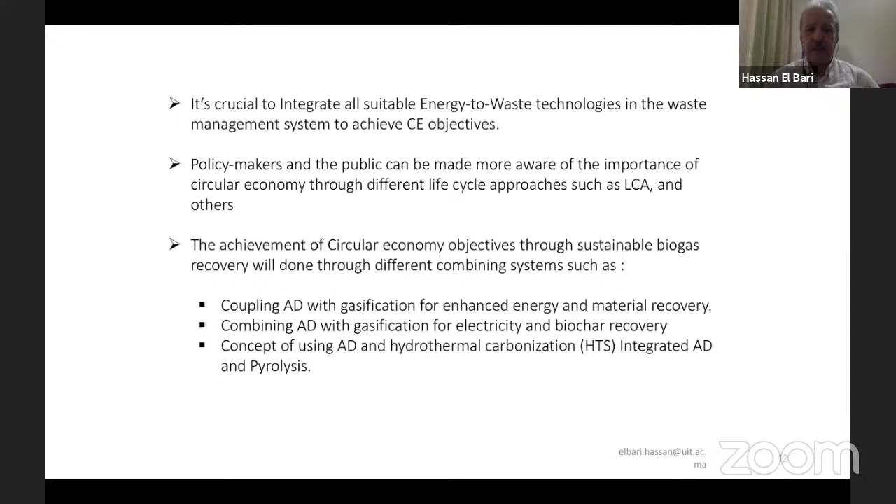Let us see now what are the main obstacles to develop biogas technology in Africa, or to overcome. In order to promote biogas technology in a given country or region, it's necessary to be aware of the main obstacles that hinder the development of biogas as a renewable energy source. What are the types of obstacles and barriers that can be considered?

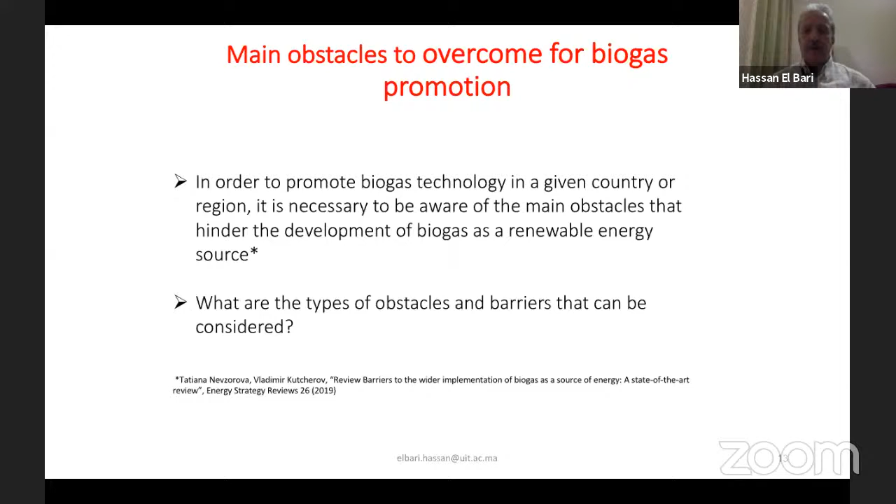We can summarize six obstacle types: first, technical obstacles; then economic obstacles; market obstacles; institutional obstacles; socio-cultural obstacles; and environmental obstacles.

Concerning institutional obstacles, the most significant institutional obstacle is the lack of a biogas national program. Significant government support for the biogas industry is therefore necessary and very useful.

Concerning the technical obstacles, these generally depend on the degree of development of the country: lack of adequate local technology suitable, and lack of qualified local technical competence.

Economic obstacles: biogas production units are characterized by very high initial investment. Using biogas as biofuel, the purification processes into biomethane also need high investment. There is unavailability of government subsidies and low interest rate bank loans, and there are only few bank loan opportunities. The growth rate of different African countries depends on the level of availability, so there is variable economic growth in the biogas market in the Middle East and Africa.

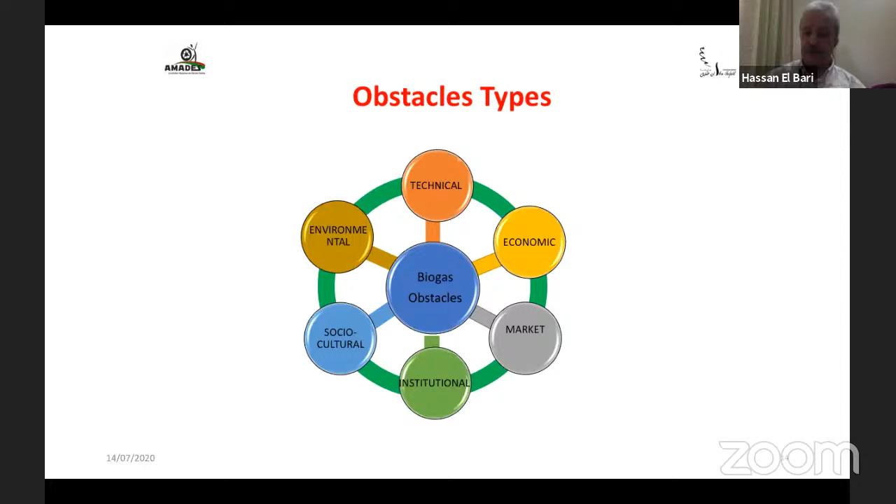So for Africa, the opportunity concerning biogas technology could contribute mainly to reducing pollution, increasing life expectancy, reducing firewood collection, increasing literacy, creating new jobs, increasing food production, and improving public health in rural areas.

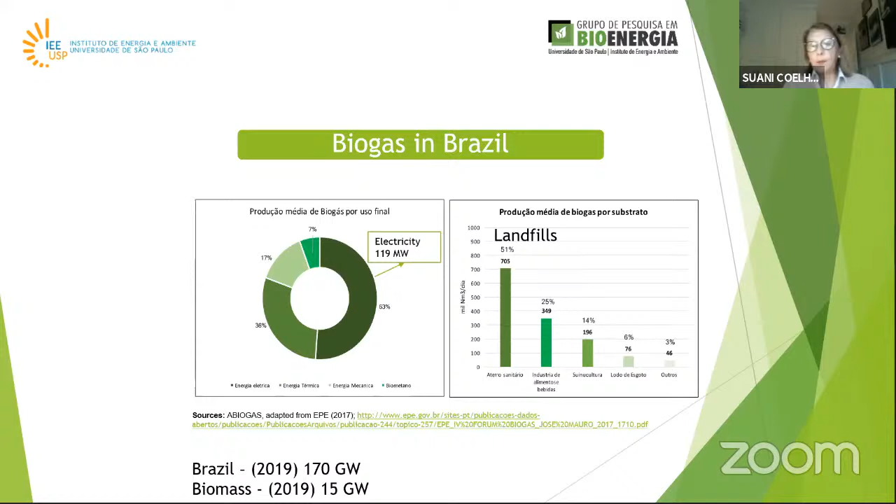In fact, this is something in very early stages. We had a little more than 100 megawatts installed with electricity from biogas, mainly landfills. The most used is electricity generation. This is not too much - the total installed power in Brazil is more than 1,000 times bigger, and only biomass in the electric matrix is 15 gigawatts. So around 100 megawatts is not that much, but anyhow, it's something that is increasing, and perspectives are very important.

We have some figures from ABiogás, the Brazilian Association of Biogas and Biomethane, showing that we have large potentials, mainly using biogas from sugar ethanol plants. I'm going to give some examples already existing in the state of São Paulo.

Well, as I said, most of biogas in Brazil is used for electricity. We have here the largest thermoelectric power plant in the state of São Paulo, Termo Verde Caieiras, with almost 30 megawatts. For us, this is a very interesting project, not only because it's the largest one in Brazil, but because we have been very much involved with them in the early stage.

Almost 15 years ago, we developed together with them a small plant of only 200 kilowatts using biogas from the landfill. It was a project funded by the federal government, and Caieiras was the landfill who accepted us to install and develop this project. Then we realized that they liked the results very much, because later on they decided to improve it. From the 200 kilowatt project, now we have a 30 megawatt project. So it's a very important project in the country.

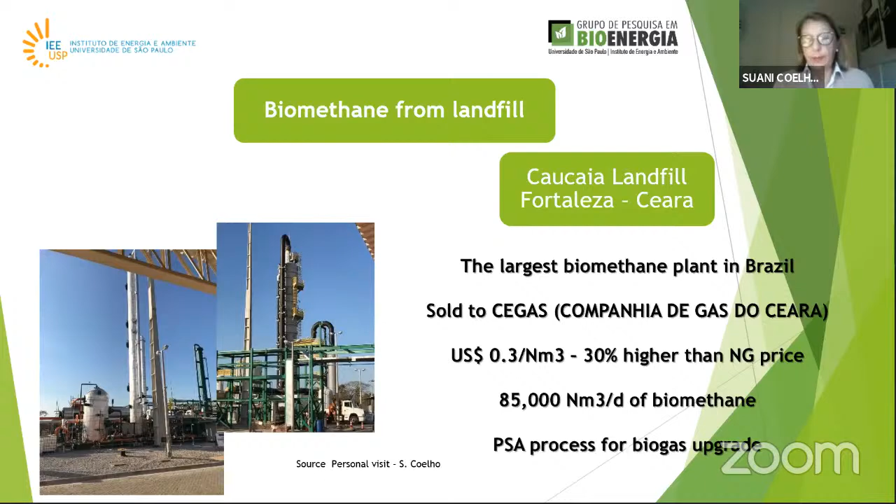Okay, going to the other sector, we have here a brief overview of the sugarcane ethanol. The main challenges we have in this sector are not only that it's only produced during the season of ethanol production, but also the large scale of the plants.

As you know, in Brazil, most ethanol production mills use vinasse for irrigation and fertilization of the sugarcane field. But we can also produce biogas from vinasse and couple this with the irrigation as well. We've had a long story of vinasse biogas for the last more than 20 years, with failures and good projects and good results.

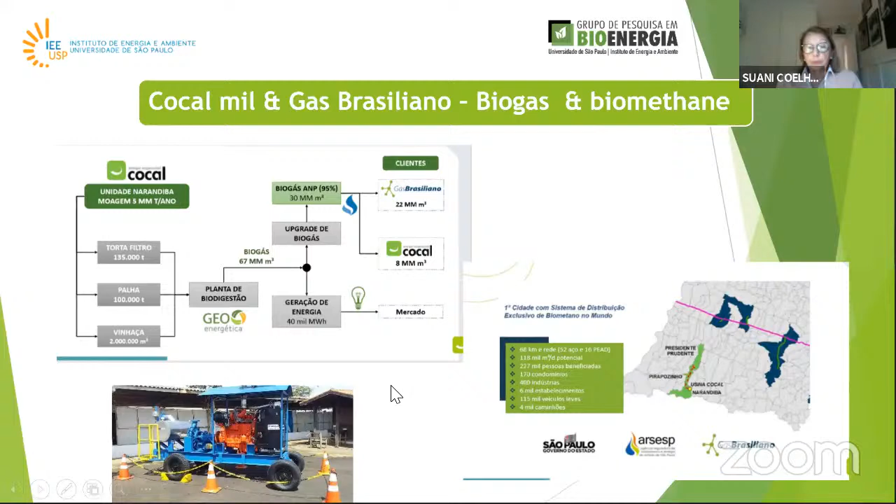But we still have a very large potential, as we have assessed in the research project that we developed at RCGI. So here you have the link. I'm not going to spend too much time on that, but here you have an interactive mapping of the state of São Paulo. It's free for download.

Then you can interact. You can touch the municipality, and then select the source: urban residues, animal residues, or sugarcane sector. Then you can see in each municipality what is the potential for biogas, for biomethane, or for electricity. The results obtained are impressive, very huge amounts that we could use for different purposes.

The most important thing is that in some areas where we do not have pipelines to inject into the grid, we can use it for a local dedicated fleet in the municipalities, as in the case of Cocal Mill. This is an experience I consider very interesting, because we can replicate it in other areas of Brazil. In the center-west, for instance, where we do not have distribution of natural gas, we could use local biomethane produced from animal, rural, or urban residues, it doesn't matter, and distribute it with dedicated pipelines.

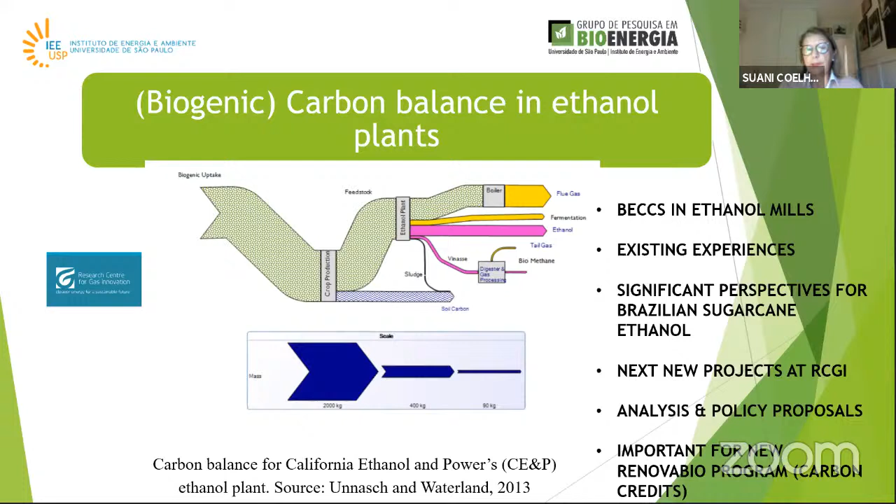Now, the target defined by the Council of Energy Policy is a reduction of 10% in the distributors' matrix, so they must buy carbon credits related to this. The idea in one of these projects is to see the impact of this bioenergy and carbon capture within the RenovaBio program. We have been working a lot during these last years on this project that I showed you, but we still have a lot of work to do, because the challenges are still very high.

Here you have the links for RCGI, for our research group at the Institute of Energy and Environment, and my personal email—I am available to answer any questions, it would be my pleasure. I hope I did not talk too much; Yuri said I had only 10 minutes, and I always talk too much, but I hope I managed. Thank you very much for the opportunity.